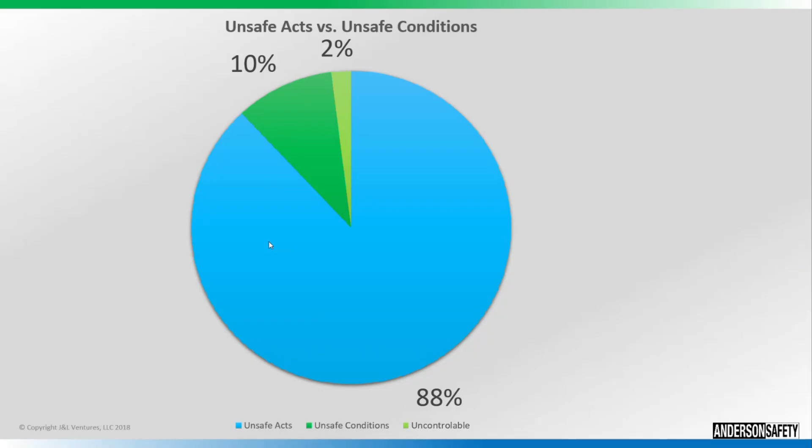So unsafe acts always seems to be the one thing that reaches out there. It's not a fringe thing. It is an 'I've been doing it this way my whole life' thing. This is how I was taught to do it. This is the way I was trained. And whether it's right or wrong, that's why it falls in this big slice of the chart. Unsafe acts versus unsafe conditions.

The question: if it's true that both of them are unsafe, why are most efforts geared toward unsafe conditions? Why do we put so much emphasis, and why do we focus more attention on an unsafe condition versus an unsafe act? We're human beings. That's kind of how you answer that.

It's easier to deal with an unsafe condition than an unsafe act. A condition is something that you can look at and recognize that what's going on is not safe, versus trying to tell someone that what they're doing is not safe. And once again, you're dealing with personalities from all walks of life, and you walk up out of the blue and just tell someone, "Hey, stop what you're doing because that's unsafe."

A lot of people don't like that. They don't want to be told that what they're doing is wrong. Hey, I know what I'm doing. I've been doing this forever. Don't try to tell me what I can do and what I can't do. I've done this a million times, and everything's been just fine. So we lean towards a condition.

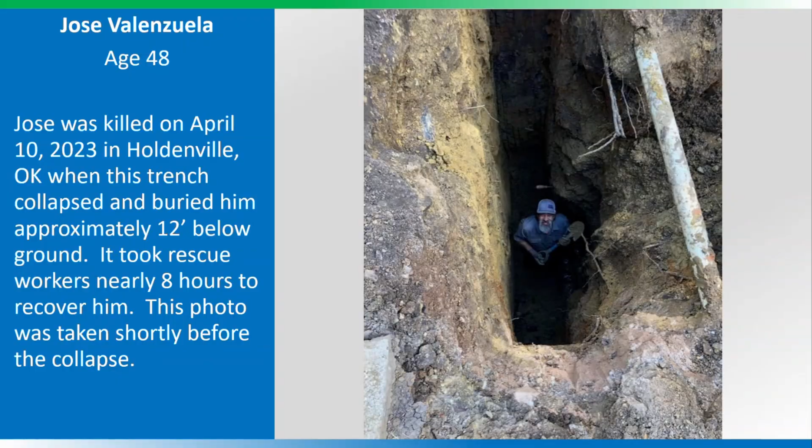And I just can't get past that sometimes. We talk about on job sites, we talk about competent people, competent person. That's the person who's capable of identifying existing and predictable hazards in the surroundings or working conditions, which are unsanitary or hazardous or dangerous to employees, and they have the authorization to take prompt corrective measures to eliminate them.

So you back up and you look at this picture, the competent person in this situation basically probably took the picture. And you see this, and then you read what it talks about a competent person being. That doesn't say anywhere in this definition that you have to have X number of years of experience, or you have to hold a degree, or that you have to be the job supervisor or the job work leader or any of those things. It says you have to be capable of identifying a hazard.

And I'm pretty sure that most people that are out here working on these job sites and working in these trenches are pretty well capable of identifying what a hazard is. You can look at the top of a stove and see a red hot burner or a flame there. You're pretty capable of identifying the fact that that's not safe to put your hand on. And basically, if you can do that, you can be on a job site and you can see a hazard and you can identify it and you know this is not good. This is not something that we want to put someone in this situation and put them in harm's way.

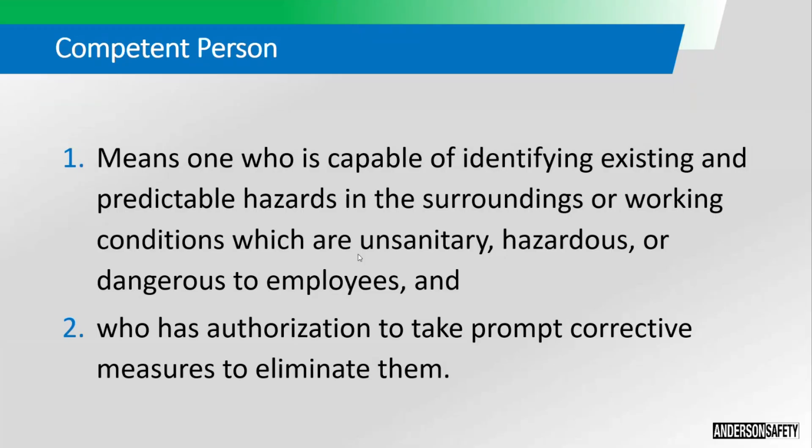And you have the authorization to take prompt corrective measures to eliminate it. So at any point, you could say, hey, stop what we're doing. We've got to fix this. We have a collapse situation here, or we've got a guy in here that can't get out. How are we going to get him out? And you don't have to be at the top half of a job. You don't have to be the superintendent. So just know that at any point you see something going wrong, you can stop it.

The duties of a competent person: inspect the excavation. Take a look at it every day. And after any time there's any kind of event that would maybe cause that to change, maybe that top of that trench would shift or something. And everybody usually thinks when you think of an event, you think rain or you think snow or you think moisture of some kind. But that could be any kind of event. That could be a thunderstorm that has a high lightning thunder volume and just the vibration on earth.

It could be a high traffic area where you're next to a roadway or where you're on a construction site and there are multiple heavy vehicles going by in proximity to that area. You could be crossing out through a field, a pasture or something, doing an excavation for cross country pipeline, and you could be working in and around a farm, and it could be a group of farm animals that are heavy. They get up close to where you're working. That could cause a change in your ground condition, and if that happens, you have to be able to identify that.

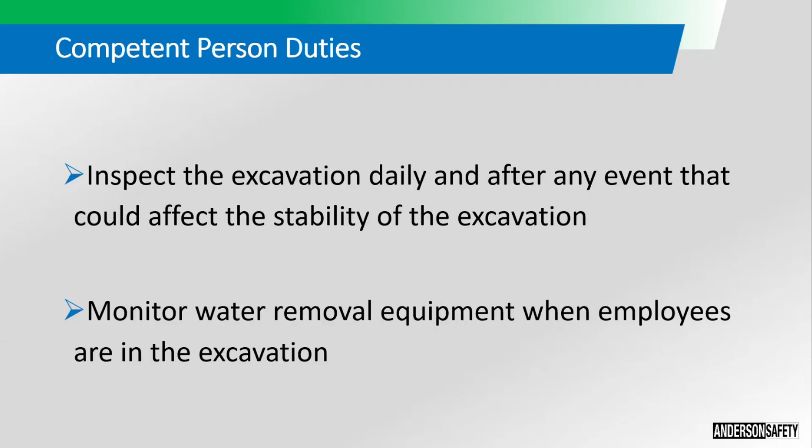It is important that if you do have a moisture event, that you monitor your water removal equipment when employees are in the excavation. If water is a situation, water is a dangerous thing, and it makes a lot of changes when you're dealing with underground. And man, if there is a water event, you definitely need to pay attention to it and take care of it. Once again, the competent person, whoever that is, the designated competent person should have and be able to demonstrate the following.

You need to have some training, some experience, and knowledge of soil analysis, use of protective systems, and requirements of 29 CFR Subpart P. That's OSHA 1926.650 through 652, and you'll also find some of it in Appendices A through F. Now, once again, that doesn't mean you have to be an out-and-out expert and college graduate to know these things.

What it means is you need to be able to look at soil. You need to know your soil types. You need to have training and knowledge, and knowledge doesn't always come from training. Knowledge is time. You spend enough time in and around something, you become very familiar with it, and you can look at it. You can determine, hey, we definitely need to shore in this place, or yeah, this is a rocky area, but we have some layering going on, or something that's not quite right,

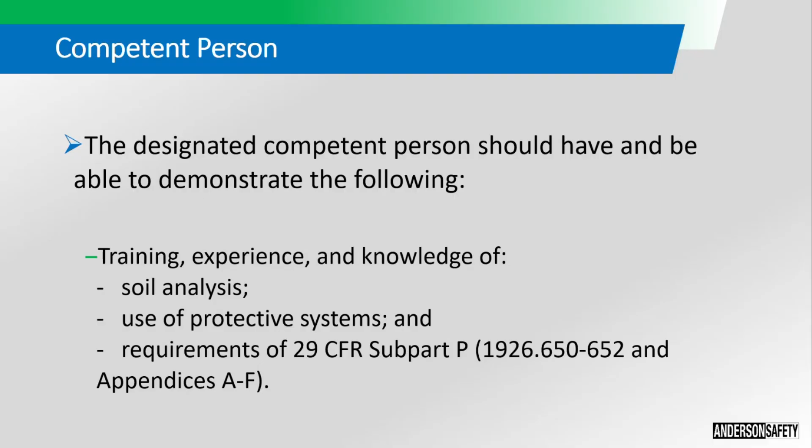All right, specific excavation requirements. There are some things we need to look at there. As we go on, not all trenches are the same. You can always look at them as you lay out before you even start; you've got to have a good idea. Okay, this is a big broad trench. There's not going to be a whole lot of cave-in danger. We're not going to have a lot of places where we're going to have people in there. So

it'll be different how you approach that than, say, one long, narrow 14-foot trench that runs for miles. So in some places you look at it and identify that, okay, yes, it is by rights a trench, but not necessarily as hazardous or dangerous as another type of trench.

Some underground installations: always locate prior to digging. Always certify deactivation. Anything that's there, make sure before you put anything in the ground that it is dead, that it has been deactivated. If it's something that's going to remain in the ground, make sure you protect it, protect around it. If you're going to take ground out from under it, always be sure it has some type of support underneath to hold it. And if at all possible, remove it, and then it's not a problem at all.

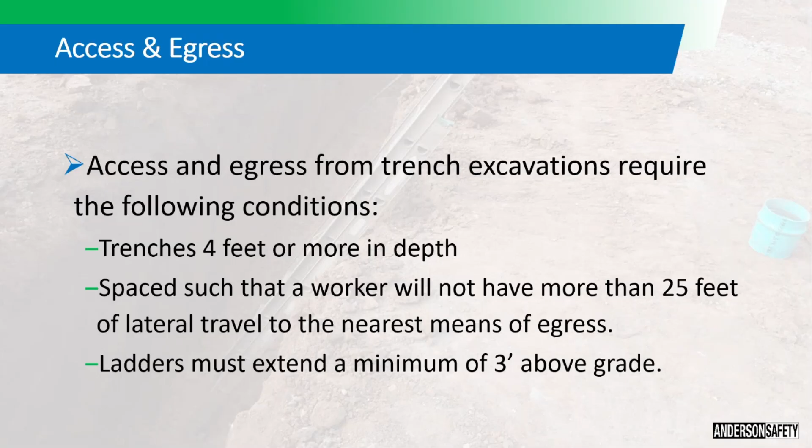So, why something that is so easy is something that you would want to bypass anyway. It's not a difficult thing to bring a ladder up 3 foot. If you don't have a ladder that will extend 3 foot, then it's time to invest in one. It's time to go and spend the money or build whatever it is you need to build, whatever you got to do to make sure that your ladder is one compliant and that it goes up 3 foot past the edge of your trench.

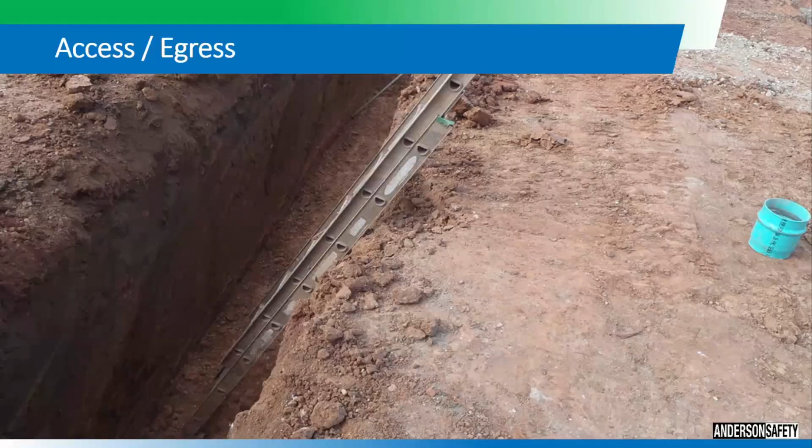There it is right there. That gets you out of that situation. That gets you on the ground. And if you look around this ladder, look at kind of the dirt and stuff that's around this ladder. I would definitely want something to hang on to whenever I get to the top of that to make sure that my first couple steps go ahead and get me back away from this trench. They keep me moving, and I don't have to worry about falling back down in here somewhere.

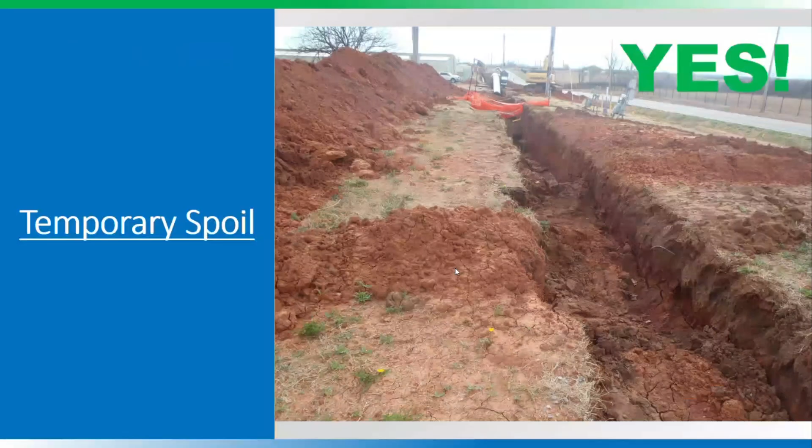Temporary spoils. You know, I don't know what's going on in this trench. It looks like maybe they've already kind of done some burying or something. But if you look down through this side of this trench where they're putting their stockpile spoil dirt, they're doing a pretty good job of keeping this dirt back away from this trench. It's clean. For the most part, you've got a good walking surface down through there, and you have enough room that if this thing decides to slough off from the top up here due to wind, erosion, wet, whatever, it doesn't come all the way back down into this trench.

That's always something that you got to keep in mind anytime you're working down in a trench. Somebody's stockpiling or spoiling right up next to that trench. Chances are you're down there working, one of those big old dirt clods rolls off, it hits you in the top of your bean. It's not going to feel good. Dirt's heavy, so you don't want it rolling in on you.

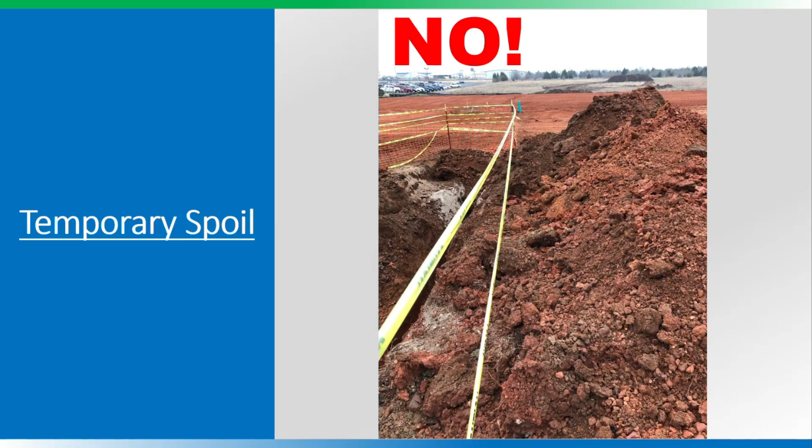definitely keep your spoil piles back. If you don't have a need for that dirt, haul it completely away, get it completely off the site. A lot of times that's a better fix yet. This is a 2 foot minimum right here.

This is what it's requiring. Now, that's on either side. It doesn't make any difference whether it's a sloped or a straight wall, it makes no difference. Whatever it is that's going to be in and around this opening has to be a minimum of 2 feet away.

I personally, if I was working in a trench, it wouldn't matter to me how wide it was, especially if it's a V-bottom trench similar to this. I wouldn't want equipment within 6 feet of where I'm working. Especially if it's just something where they're loading out dirt or they're driving by on their way to another area, say to deliver something. I would build myself a good 6 foot perimeter around all of that. And then I don't have to worry about vibration from equipment.

I don't have to worry about people bringing something in that are unfamiliar with the area and coming up on our trench unexpectedly. People coming in and out of a trench, and you have equipment within 2 feet moving. Boy, anything could happen. You might come out of there, and they might not see you before they're right there on top of you. They could hit you, cause you some physical damage. You don't want that. So just make sure, 2 foot minimum at least, but the more room you can give yourself and your workers, the better you are.

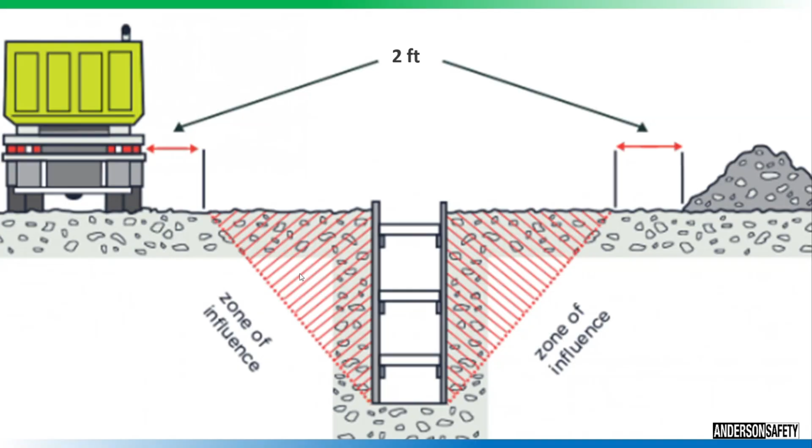Once again, that 2 foot does not mean it is from wherever the edge of the dirt is at. Because if this dirt is backfill dirt, that does not make that an area that you can now drive over until that dirt has been compacted or filled and this trench is no longer here. That 2 foot still has to come from where you have that undisturbed soil. It doesn't give you an instant okay to bring whatever it is inside of this area where this dirt has been disturbed and then filled back. This dirt could still be influenced. So just keep that in mind.

Now, by the numbers, you've got 2 foot, and 2 foot is the distance away from the excavation the spoil pile, tools, materials, and equipment must be placed. Just a quick reference here, 3 foot, that's your ladder. When required, it must extend above the landing by at least 3 foot. Your 4 foot depth, that's the depth at which egress ladders are required. And at 5 foot depth, that is the depth that cave-in protection is required.

Now, if it is 4 foot 11 inches, is it required? If it was me, it would be a yes. But if you can maintain that exact 4 foot 11 through the length of a trench and not be anywhere where you're at 5 foot, then I would say fine, you don't need it. But for me, if I was anywhere near 5 foot, I would just go ahead and use it and be done with it. Unless you're working in a soil that is absolutely safe, and you're at 4 foot 8, 4 foot 10, then I think you'd be okay.

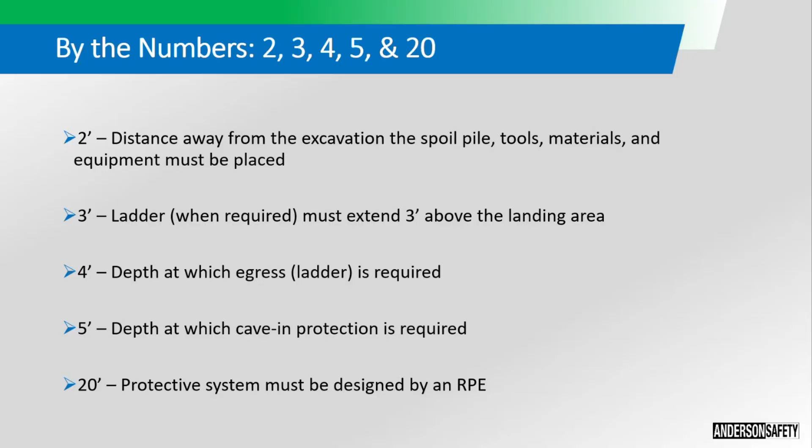I definitely don't think you'd want to rely on me to do the engineering for that, because 20 foot, a lot of dirt. I might steer you wrong. I might tell you, just throw a couple 2x4s down there and brace across it, you'll be all right. I would never do that. Don't take my word for it. You find an engineer when you get below 20 feet. Boy, that's a lot of distance between you and the surface. So definitely have it engineered and make sure that what you're going to put in there for protection actually does what it's supposed to do.

So say you're working in a trench and the area you're working in is 4 feet deep. And right, 5 feet or less away from you, that trench drops down to a depth of over 5 feet. And you're done at the end of the day and you take off your hard hat to wipe the sweat off your brow, and your hard hat comes out of your hand and it rolls down into that 5 feet or greater depth. Are you good to go just to hop in there real quick in that deeper area and grab your hard hat and hop back into that safe area?

I'll tell you right now, there aren't enough zeros to put behind a number for what my life is worth. And that's the only approach I'm going to have about it. And there's no reason for me to want to put myself in a place where someone would have to make that decision on what my life would be worth. Well, there's too many options out there for protective systems. There's too many ways that you can keep yourself and your people and your coworkers safe without having that be the decision.

And you know, we've come far and away. So many advances have been made in protective systems, and all of the things that we talk about when we talk about trenches and excavations. The one thing that hasn't changed is dirt. Dirt is dirt. We haven't come out with any kind of synthetic blend. They haven't gone and replaced the top 15 layers of dirt with the new and improved AI dirt yet that keeps us all safe, that's smart dirt. It knows not to cave itself in. Dirt hasn't changed. We're not looking at any advances that's going to make dirt change.

So what we know is that we bring advances into trenching, since we have to deal with that dirt that we already know isn't going to change, that we can put in place and keep us safe. And it has come a long way. In trenching, the first safeties, a lot of it was just plywood and 4x4s. And those systems were rudimentary at best, but it was a beginning. And so now, they come out with so many things we can do now. Just the dirt alone, you can slope it.

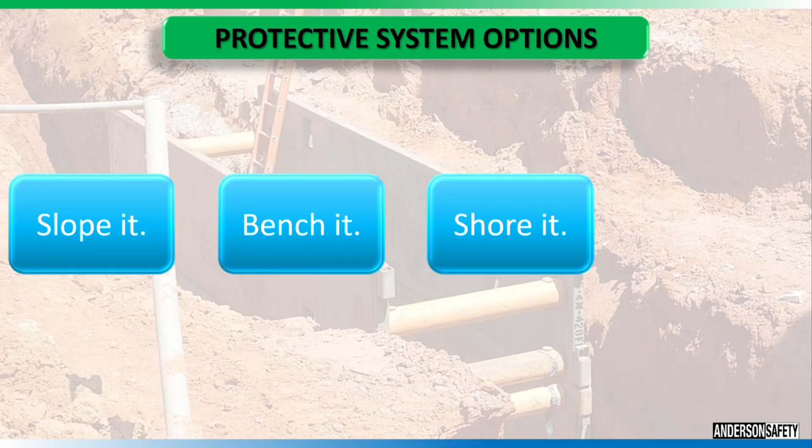There's hydraulic shoring that you can put in place. Whether you purchase them, whether you rent them, whichever way you go, there's always a way to shore it. There's always a way to bench it or slope it, and that alone just protects your people. If nothing else, end result, you can shield it. You can just go in there and continuously create a shield all the way down through it, and that way, no matter what, it's not going to come in on you.

They're designed to keep them from coming in on you, depending on your soil types. If you're sloping it, you got type A soil and stable rock. Stable rock, you'd be vertical, up to a 90-degree angle. Type A is 3/4 to 1 at a 53-degree angle. Type B is 1 to 1 at 45. Type C is 1.5 to 1 at 34. And type A short term is a half to 1 at 63, for a maximum excavation depth of 12 feet for less than 24 hours.

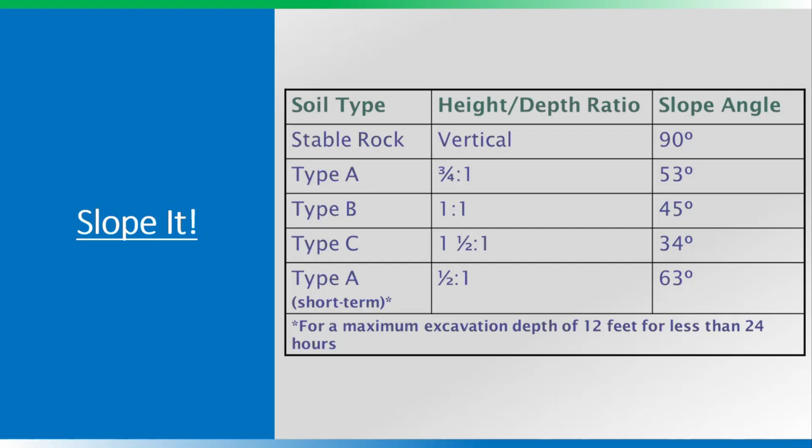There's a bench right there. You look at that picture, and in order to get to a place where in the bottom down here they have a safe working environment, look at the amount of work that went into this to get them to that point. All of this was brought back in these lifts, and that took time. And as you're looking at this, you can kind of see it right here in this photo. This dirt has given. It sloughed right here a little bit.

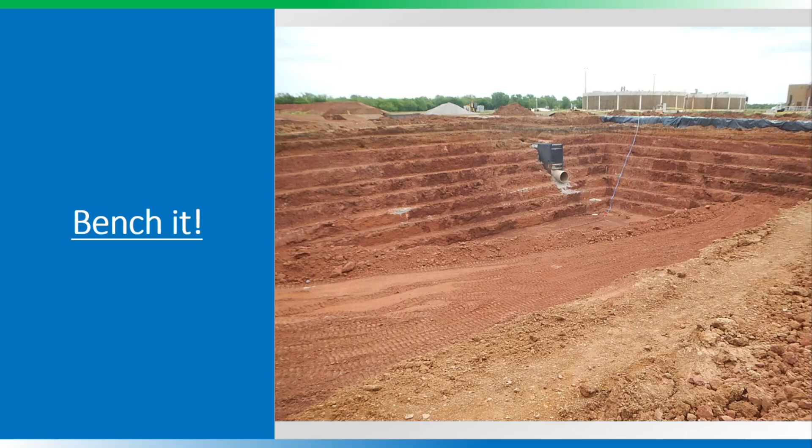And the thing about it is that never reaches the bottom. It stops itself. It prevents itself from becoming a catastrophic thing that could have got down here and injured somebody as they were working in the bottom of this. So that's an incredible example of a good bench.

Here again, another good example of what happens when your dirt gives. It looks like maybe there was a water event, maybe some washing going on up here at the top in these couple of layers. And look how it brought this dirt down, but it never brought it down to a place where it was going to cause someone down here working in the bottom area to be trapped or caught or struck by that dirt as it comes down. Dirt is not a lightweight thing. Let's look back at this real quick.

Seeing that dirt slough off and thinking about the weight of dirt reminds me of a while back. There was a deal going around, I think it was a TikTok thing, called the Ice Bucket Challenge. Kids would raise money by taking a bucket of ice water and pouring it on top of somebody else's head. I remember a video of a dad that had filled up a whole backhoe bucket full of ice water, and his kids were standing under it. He dumped that water on them, and they were standing on a driveway or a concrete pad, and boy, when that water hit them, it literally washed them out.

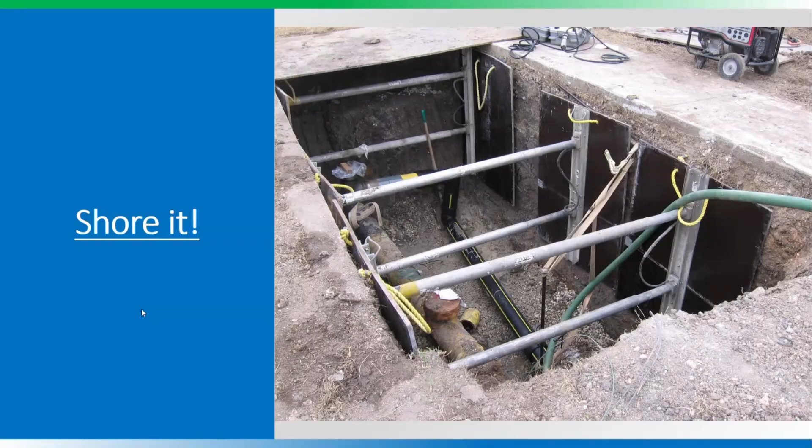But you look at the shoring that's going on in this picture, and it looks like maybe these are some hydraulic shores that they have put in place here just to hold back these sides, to keep that dirt stable under this area of compaction or concrete.

Maybe it looks like a street or something that they're working in here. And so these are spread across, and they're holding pressure against this dirt to prevent it from wanting to slough in. This picture, there's some good things that you see in this picture and some bad things that you see in this picture. For one, personally, I wouldn't have my equipment this close to my edge, especially in a project where I felt the need to shore.

I would do everything I could to keep my equipment back out of the way, back out of the work zone that could be a vibration factor or something that way, even though it's shored up. Vibration could break some of this stuff in these corners and stuff loose. So, always be cognizant of what you're doing and where you're doing it and what else is going on around it. Anytime you can give yourself distance with equipment on the edge of a trench of any kind, by all means, give yourself the benefit of the doubt.

This here's some different types. This is what goes on when your soil starts to move. It can happen in any place. You get this arching going on. This is where your struts are holding against your walls, and what this is doing is this is putting pressure in those arch points and holding it back.

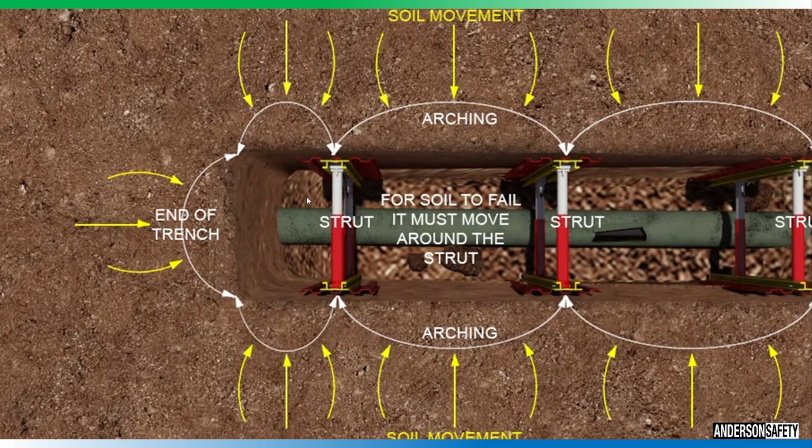Now end of the trench here. If you notice, in there's nothing, but you're working. These are the areas that you're working in, and you might be working away from that end, and so you don't have to worry about it being an issue. And if you did have to do that, how would you support that? This would have to be supported with something other than a strut system in order to make that safe.

Here's the tabulation data. We're not going to go super deep into this because this is just one, and it's a brand, and everybody that has a product out there is going to be different. It's going to give you basically their stats on it, and so this is just kind of a general rule on what it would look like. This is something you would want to see. You would want to have this.

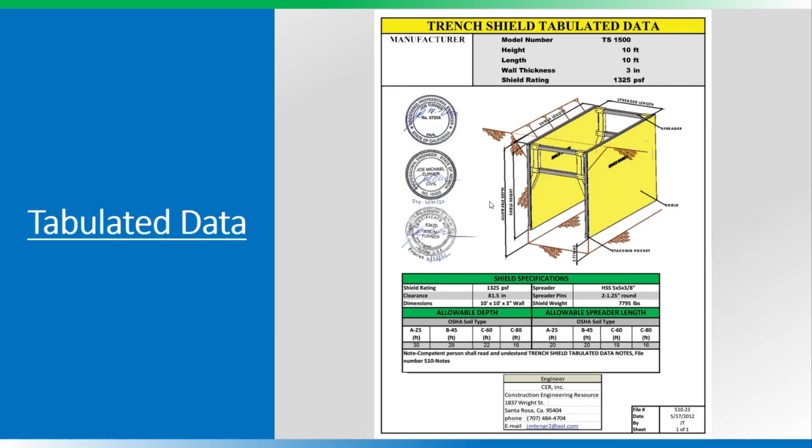If you're going to use it, especially if you're the owner of a piece of equipment, this is something that if you get a hold of it, you keep. You put this in your files. You know what your equipment is, you know what it's capable of doing. And always keep that fresh where if you need it, you can go to it. Anybody have any questions?

Whenever it comes to trenching and excavating, there are so many things that can go into it that a lot of times you don't prepare yourself for it. One of the things that I learned early on is that you don't have to be completely buried in a trench for that trench to cause you a death. Where I'm from, I live down around Lawton, and there was a contractor that was working in an area in Lawton.

It was late in the day, and just two people on site. The company just had two guys working late. One of them was down in a trench, wasn't a very deep trench, and the other one was on a piece of equipment. It was a depth that was deep enough that it should have been shored. It should have required some shoring or some boxes of some type to keep that guy that was down there safe. They were just wrapping up their day, and the trench caved. It gave.